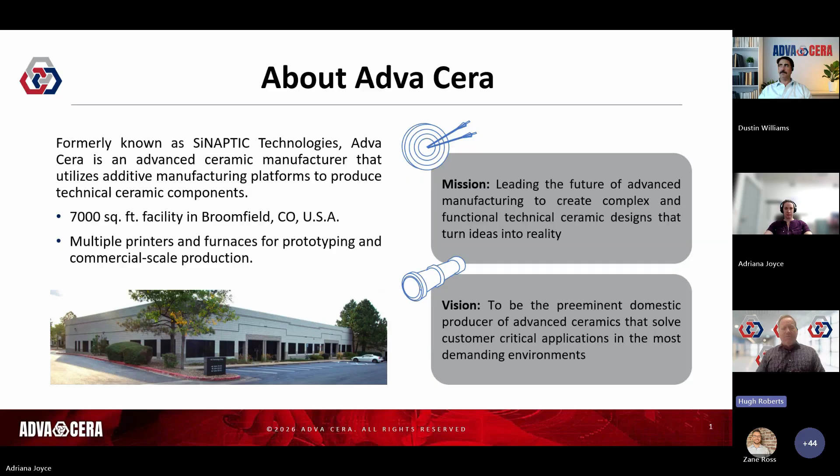A bit of just the company timeline. The company was founded by me and by my co-founder, Dr. Brian Shear, in November of '22. We both had come along this journey because of our interest in silicon nitride as a biomedical implant. We saw the benefits of it being able to outperform titanium or polymer implants, and it was just a better choice for humans.

But we also saw the limitations of traditional manufacturing of ceramics and how that really constrained the ability to develop and grow this material. When we got connected with folks primarily at Lithoz to begin with and understood the true capacity of printing ceramics, it really was a game changer for what we thought the technology and what we thought our mission would be. As we began this journey, my background is medical device, my co-founder is an orthopedic surgeon. This was really going to be kind of the leading beacon for the company.

But we quickly realized as we were starting down the path that there was really no company serving as a service provider, service bureau if you will, for technical ceramics that were additively manufactured in any vertical, at least from a domestic perspective, and really not very many in the world as well. I think there's probably 5 companies that are very focused on printing additive ceramics. So we quickly pivoted and widened our scope and began looking at some of these other verticals that really had much greater total addressable markets than the surgical market we were looking at. We began to really open this up and look at many different verticals for selling our parts.

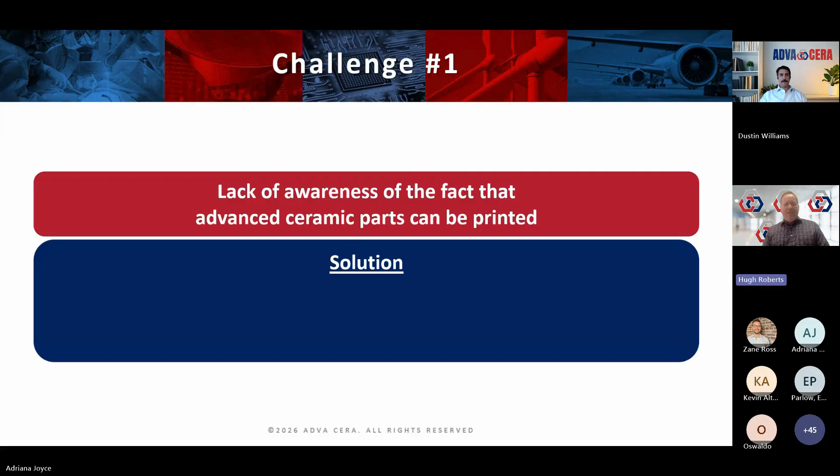That's something people say all the time to us - I didn't know you could print ceramic parts, but you can. And our solution is obviously an opportunity for us to provide customer education on the existence and the rapid growth of the technology, especially focusing on target applications that solve problems for those customers where we can help them out.

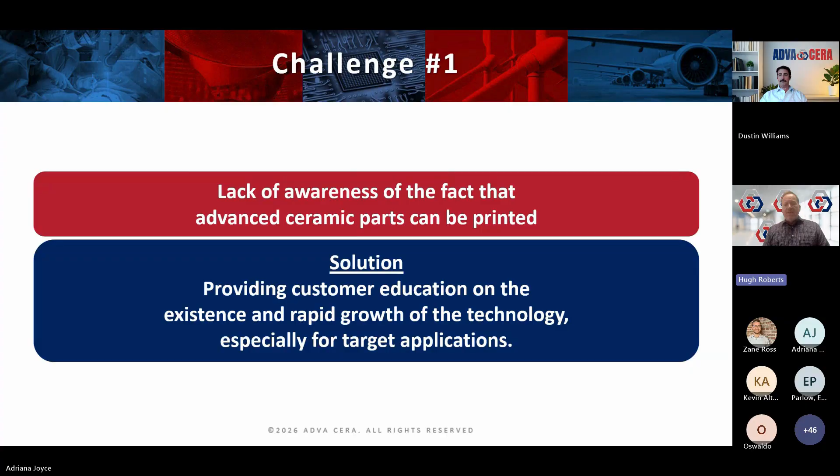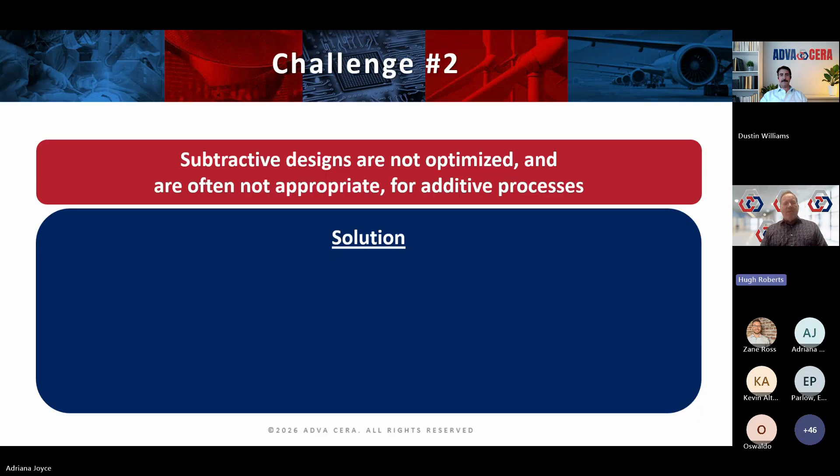Challenge 2: Subtractive designs are not optimized and are often not appropriate for additive processes. Please, please, please don't bring me your traditional ball bearing that you've been making traditionally for years and years. We're not going to help you by making that better because we can print it - that's not really where our talent lies.

Our talents are really more specifically where you need parts that are lightweighted or made more lightweight. Structural complexity, near net shape manufacturing is something we can do quite well. Part consolidation, taking 2 or 3 components and turning it into one part, I think is a great opportunity for AM ceramics. Anything where high resolution or internal geometries are important.

One of the great things about additive manufacturing of ceramics is we're not limited by tooling requirements. So if you need a ball bearing with some sort of heat channeling or heat dissipation, that's a part you probably want to bring to us, and we can do that and make you satisfied and happy with what we're producing.

But at the end of the day, really what this requires is collaboration with our customers, and that's essential for helping to educate and optimize designing for additive manufacturing. That's been a great opportunity for us to really open the minds and eyes of a lot of the engineers and folks that we work with to see how they can push the boundaries of the parts they're trying to make with additive manufacturing of ceramics.

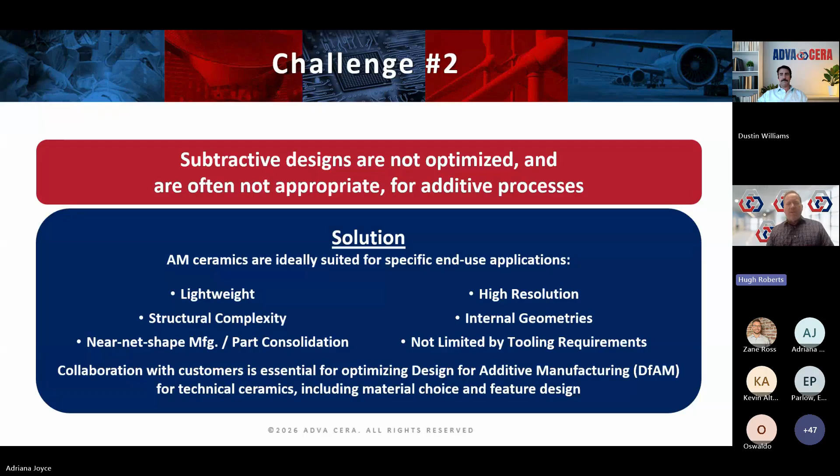This is obviously a challenge for us as well: adoption of AM ceramics is slow due to customers' uncertainty of performance. When we started the company, we recognized that we were going to be ahead of the market, as first movers generally are. And I think that the market is beginning really to catch up with us.

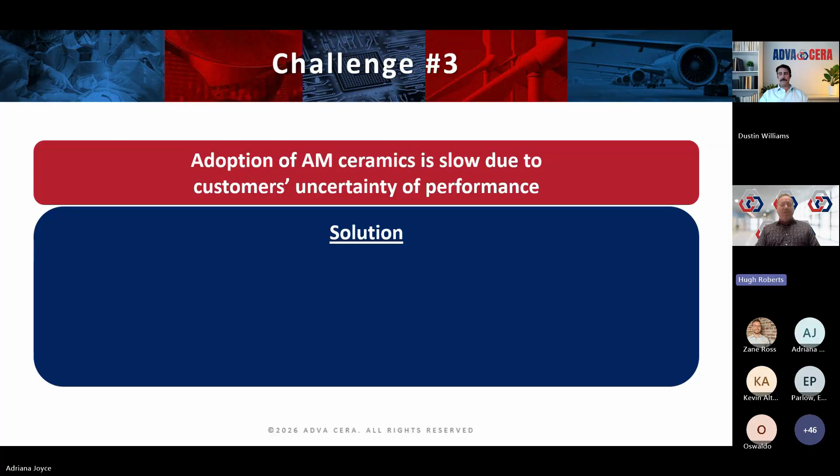I kind of liken this to when electric cars first came out. People really thought that was interesting and thought they were great and weren't ready to buy them. They were just not sure, they just had some hesitation. And so we think that's kind of some of what we do here. We do a lot of prototyping, but getting people comfortable with moving on to production, that's starting to happen much more regularly now, but it was a process for us in the beginning.

And I think that some of this is really going to be best solved by our investment in testing and other activities to determine the material performance and see how well they hold up in end use environments. We are certainly in that stage of the game today, kind of solving and building that trust issue for our customers.

And as I talked about earlier with NIST and with Colorado School of Mines, we're really looking to develop more standards for AM ceramics because there just aren't many today, and create property libraries that we can develop to control material properties and really put out more information about these parts and how they are best suited to solve challenges and work in the marketplace today, despite what vertical that may be - aerospace, semicon, industrial, what have you.

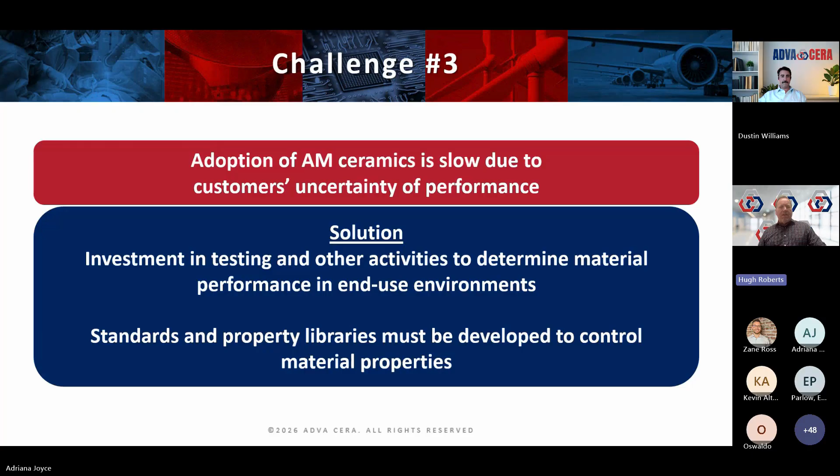Okay, those are the 3 challenges that I really think are at top of mind. And this is the end of my part of the presentation.

So next, I'm going to turn this over to Adriana Joyce. Adriana is an esteemed colleague of mine, and she runs all of the R&D initiatives for the company, which, as you all might imagine, are significant and copious, and she does a fantastic job. So she's going to spend a little time talking about technical capabilities.

Thanks, Hugh. Yeah, want to jump into some of the technical capabilities that we have, as well as some of the design considerations that we look at when working with printing ceramics.

Here at AdvaCera, we've got two types of DLP printers. The Lithoz printer, which we have six of, has a 102 by 64 millimeter build plate, and the Z range is 320 millimeters, so we can print pretty tall parts, although they're not huge in the XY. That is the build plate size.

But because we are printing a ceramic part out of a polymer ceramic suspension, the dimensions of the final part are a little bit smaller, closer to a business card off the Lithoz printers. The light source on the Lithoz comes up from underneath. Looking here on the screen, you can see the lights going up from underneath. That build plate moves up and down over top of the vat.

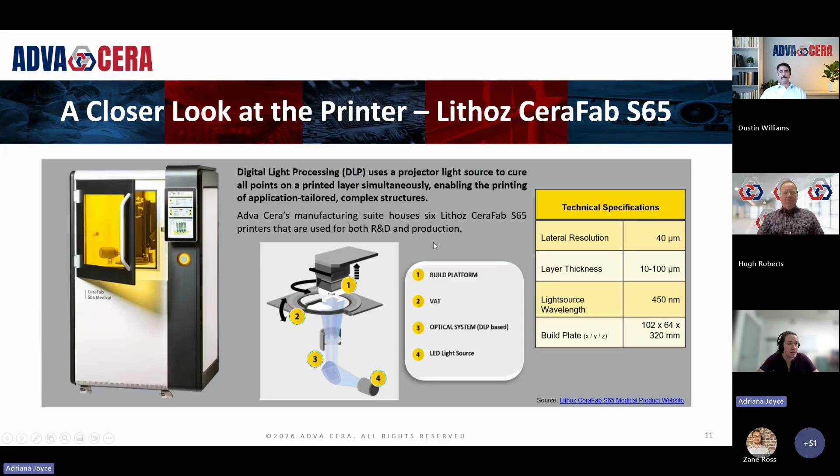On the other hand, the second type of printer that we have is the Prodways Ceram Pro. This one is still DLP, but the mechanism is a little bit different. The light is coming down from the top. It reflects off a mirror, projects down onto the build plate. So the parts become more and more submerged into the vat, into the slurry during the printing process.

Pros and cons to both methods, and we'll talk a little bit more about how each one impacts the printing process. But one of the interesting bits about the Prodways is because this projector is up on the top side of the printer rather than underneath, it has a little bit more mobility, which gives some modularity to this printer.

A single exposure is 66 by 41 millimeters, but because the projector can move, the build plate is modular. So it can go from that single tile exposure up to a 32 tile build plate, making the maximum build plate 264 by 328 millimeters. Quite a bit larger than the Lithoz, although you are then working around the effects of that moving light.

Printing ceramics in general, we can achieve fantastic parts, highly complex with excellent tolerances and sufficient strength for a wide variety of applications. Either of these printers work for a variety of parts, although we pick and choose which part works best depending on the part itself. We can lightweight parts with internal lattices, create complex internal channels for cooling applications, and vary that strength and porosity as the application requires.

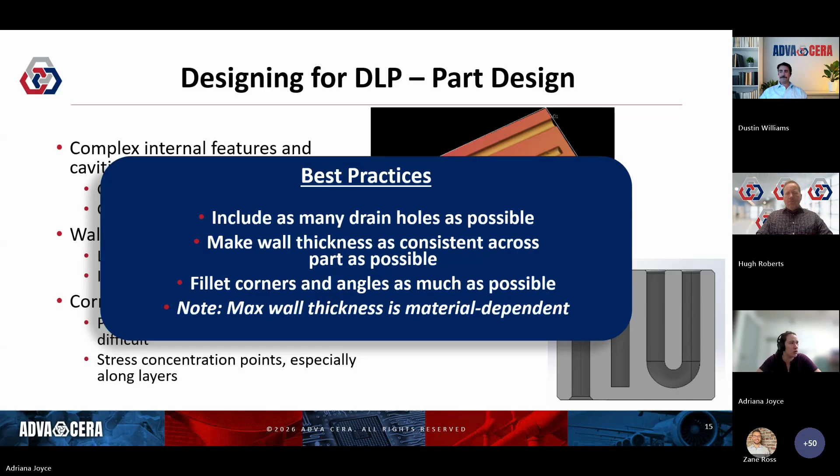Another aspect to consider is that we're taking a native shape—something with smooth curves, round features—and voxelating it. Think of it like making a sphere out of Legos. You know it's supposed to be a sphere, but depending on how big it is, it may look a lot more like a cube because your limiting factor is the size of those Lego bricks.

The pixels on the Lithoz printers are 40 micron, and on the Prodways are 31. That means the minimum feature and tolerances have to account for the way the slice of an image is going to approximate a smooth curve with those tiny squares.

The pixels on the printer take a 400 micron circle and approximate it like this—we've got some pretty harsh stepping and square aspects to what should be a circle. A straight edge not aligned with the pixel grid becomes very stepped, giving a stair-step effect like the printed part shown in figure B along the bottom. Radii approximated by very few pixel steps, like the one shown in B on the right side of the image, don't approximate the size of the feature very well, because we're using pixels larger than the change we need to make to the feature.

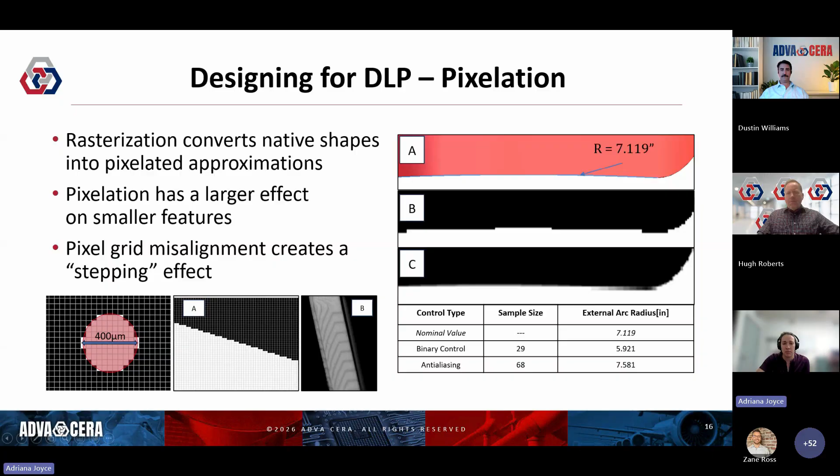But we've got a couple tools to work around these limitations. If we know we have critical features, such as a straight edge that needs to be straight and smooth, we can align that to the pixel grid, so it becomes smooth while less critical features can suffer the stepping effect. We can also size features, if designing the part from the beginning, to multiples of the pixels. Taking into account the scaling needed for shrinkage during debinding, we can make features pixel-sized and avoid the dimensional drift that occurs when a repeated feature or part doesn't stay constantly aligned with the pixel grid. There's also anti-aliasing.

It's well established in other additive manufacturing processes, and that adjusts the intensity of individual pixels, giving us a grayscale effect, which lets us make this 7-inch radius curved feature much closer. Nominal is 7.1. Using binary control, we achieved about 5.9 inches, but with anti-aliasing, we can get much closer, with a 7.5-inch radius on the final part.

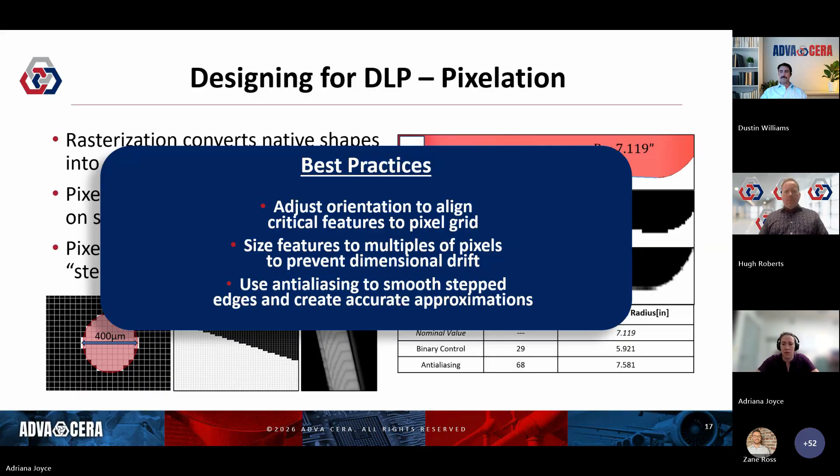The same pixels that are approximating the native shape are projecting light up into the slurry. Fortunately, the light follows the laws of physics and doesn't stay contained in a perfect little square column, convenient as that would be. As the light travels up into the slurry from either direction, above or below, whichever way the projector is going, it encounters the ceramic particles suspended in the photopolymer resin. Those particles absorb and scatter the light, and the scattered light encounters photoinitiators outside of the desired curing zone. This causes overpolymerization and increases the dimension of our part outside the design value.

This effect is material-, slurry-, intensity-, and feature-dependent. Looking at these images along the bottom, for a point, narrow versus wide, and internal versus external, we get a dramatically different amount of overpolymerization, or overcure, depending on the terminology you want to use. That's because depending on the cross-section, the total amount of light density around the point of that corner is different. On internal angles, we've got more light coming in from both sides, increasing the total amount of scatter and therefore the amount of overpolymerization.

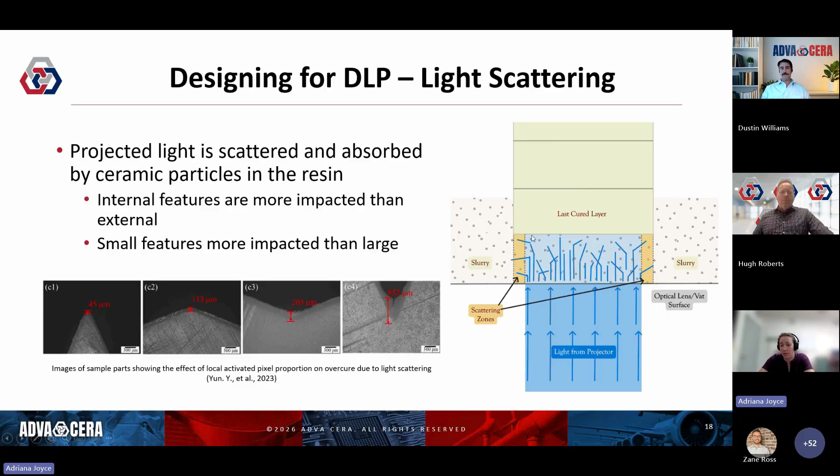But with the knowledge we have around this technology, we've got several ways to account for this. We can modify the exposure time and light intensity to minimize the scatter. We can also modify the dimensions of the CAD model. We've got a database at this point of overpolymerization experienced at different feature sizes, energies, and slurries, so we can modify the CAD model in advance of printing to account for that overpolymerization. And if it changes a little bit with individual features, that's the iterative process of additive manufacturing.

Because we can iterate several times on the same build plate, it's very easy to iterate through green models. We can put three different sizes on one build plate and figure out exactly what overpolymerization each feature is experiencing, finding it all out when one print finishes instead of having to wait for the part to go through the entire sintering process.

And you could probably predict my last point: again, we can orient the parts to protect those critical features. Knowing in advance whether it's a fitting feature or an exact tolerance, we can change how the part is sitting on the build plate to change the light density around a given feature.

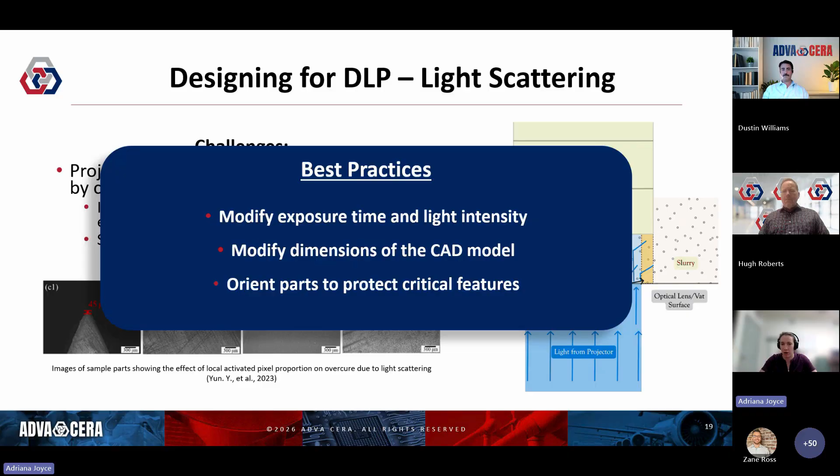We keep talking about print orientation because it's really interesting and it's one of the easiest tools we have to change what the final part looks like. On the Lithoz printer, the part is hanging upside down, and the vat has only enough slurry for a single layer, every layer. It's very efficient in terms of slurry use, and it actually allows the slurry to drain out of open features because they're hanging upside down.

But it also means we're fighting gravity with every layer because of the weight of the part. Any feature that closes up before the print is finished traps any remaining slurry inside it, facing the build plate. It also means the face of the part attached to the build plate needs to be large and flat, or we have to add supports to keep it attached. Overhangs have to be able to support themselves against gravity, or we have to add supports to keep them from flapping around.

On the Prodways printer, the light's coming from the other direction. The part descends into the vat as the layers build up from the positive Z direction. So we aren't fighting gravity, but the part is filling up with slurry. Any feature with a partially or entirely closed cavity is going to come off the printer completely full of slurry. It increases our slurry usage and increases the time required to clean parts. Additionally, the part has to be connected to the build plate well enough that it doesn't float up and away during printing, or get knocked over by the slurry and the blade moving across during each recoat at the end of the layer.

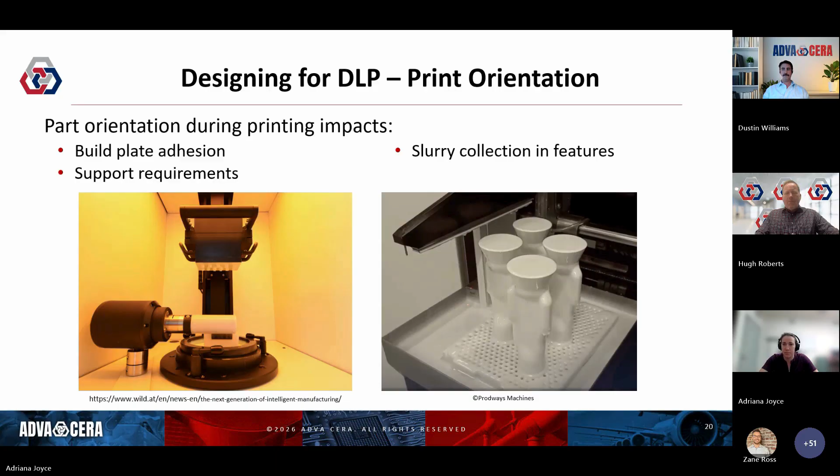With these kind of opposite methodologies, we can choose the printer make and the print orientation depending on the part itself. Minimizing the supported faces is pretty easy if we know in advance which are the critical features, and we can choose where the supports are and how it's sitting on the build plate to do that.

We can also leverage those drain holes that I talked about earlier to allow collected slurry to drain either during the printing process or during cleaning, so we can flow more solvent through, get all of that excess slurry out, and end up with better tolerances and cleaner internal features.

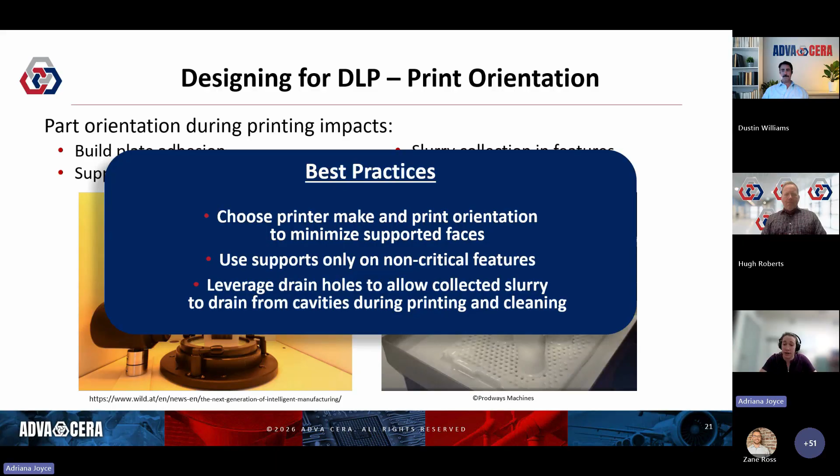Sometimes that print orientation might mean the print takes a little bit longer because it has to be printed in a vertical instead of horizontal orientation. But because the cleaning, thermal processing, and post-processing cleaning up any residual from supports are all simplified, the final part actually ends up being less expensive and much higher quality.

Overall, the things I'd like you to remember as you're designing and working with parts for ceramic additive manufacturing: wall thickness is a material limitation. We have a maximum wall thickness based on the raw slurry, so adding lightweighting features and making sure that wall thickness is consistent all the way across the part will help us get a successful part out.

Use fillets as large and as often as possible, and add drain holes anywhere that you can so that features are better cleaned and the internal features are more true to the design.

We also have to take into account that shrinkage, and make sure that if we are aligning features to the pixel grid, the scaled part is what actually aligns.

As we're printing, spend a lot of time looking at critical features and faces so that we can orient well on the build plate, both to maximize efficiency and protect the critical features. That also allows us to minimize the number of supports required, and consider what overhangs and other features require supports, minimizing those where we can.

We also have to look at the light scattering and the light density in the critical areas. That's more of a CAD model and design consideration, but it also impacts the print orientation as we're going through it. I think that's all I've got from a technical perspective.

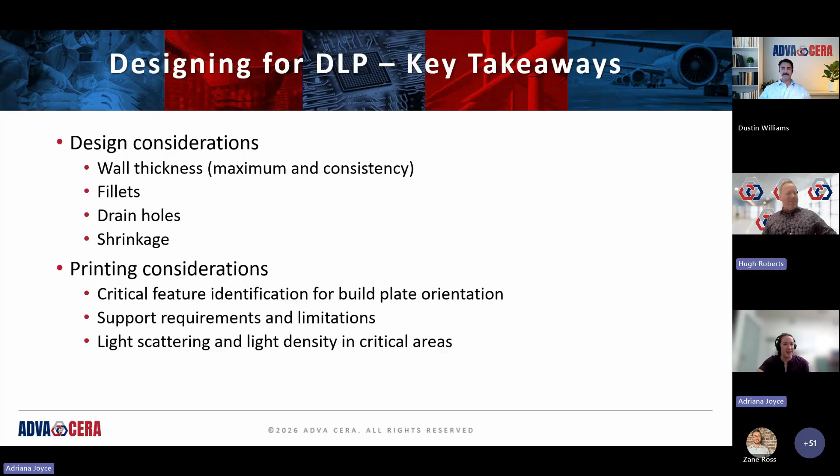Next slide. So obviously, folks, you can tell that this has been many thousands of hours of R&D on AdvaCera's behalf. We've really unlocked a lot of key knowledge of how additive manufacturing for ceramics works.

Now I'd like to bring in my esteemed colleague, Dustin Williams, who runs business development. This is actually the second time I've had the opportunity and privilege to work with Dustin, and he's done a great job with both companies. So he wanted to spend a little time piecing this together and talking more about collaboration and opportunities.

Dustin, take it away. Yeah, appreciate that. Thanks Hugh, and great job Adriana. She was one of the first employees at AdvaCera, formerly Synaptic, so she's really kind of paved the path for this development of our materials, using the technology that we have. She does a great job working with customers and understanding the application and how we could potentially provide solutions for some of those applications.

But why don't we move into what kind of materials, right? What are we printing exactly, and how can they be used? So here's a list of the materials that we are working with currently.

Let's go ahead and start with alumina. It's really the backbone of technical ceramics. When this technology, DLP technology, was first invented 12, 14 years ago, this was the first material that it was developed for. So it's a widely used ceramic. It has a great combination of hardness, thermal stability, and corrosion and wear resistance. There are many applications that can be utilized with alumina, or aluminum oxide. It prints really well, and it can be processed in an oxygen environment, which is always helpful in our post-processing of producing these parts.

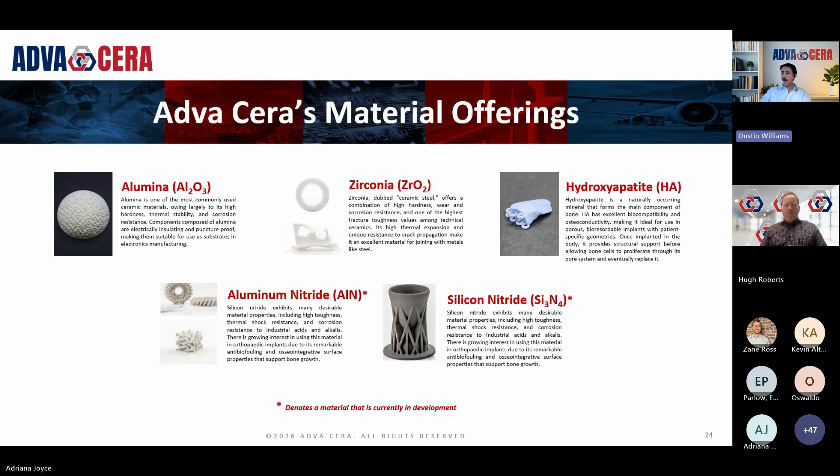Why don't we go ahead and move to the next slide? We can start getting into some specific applications for some of these materials. Starting with aerospace and defense, the audience within America Makes, this is a high vertical for most of the members within the organization, as well as ourselves. Some of our biggest market segments are aerospace, defense, semicon manufacturing, a lot of industrial applications, and filtration applications.

But specifically talking about aerospace and defense, weight is always going to be a consideration. So with our ability to create these complex geometries and hollow out areas or lattice areas to save weight and save density of parts, we have that advantage. And of course, we're talking about extreme environments, and these materials can withstand a lot of those environments.

Another thing Hugh kind of touched on this: manufacturing ceramics is not easy from a traditional standpoint, and therefore it's also costly. So there are some applications where perhaps there's some low volume needed, and the only other way to make a design is a complex tool, which we all know are very expensive. So we do have some advantages there of potentially reducing costs for some of these complex designs, and that customization that just perhaps isn't possible with traditional manufacturing as well.

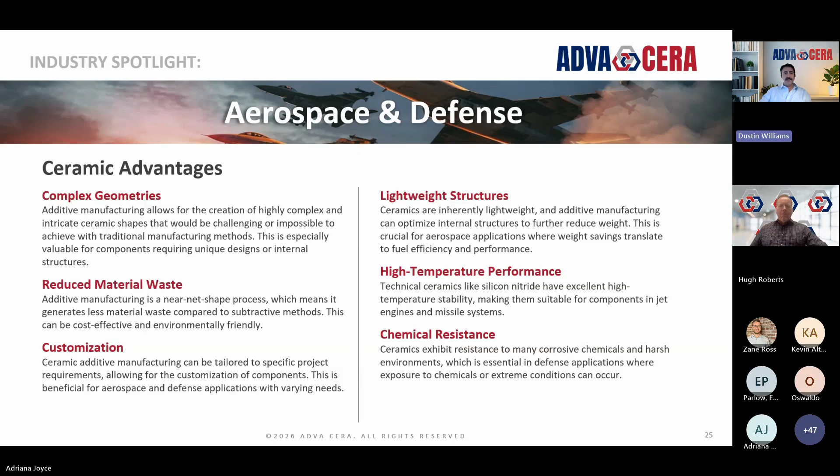So let's just start with alumina. We do a lot of internal features for the alumina components: high voltage insulators, RF microwave switching or filter components, corrosion resistant manifolds or gas diffusion nozzles, radomes, some other dielectric structures, fuel cell components, and filtration in both extreme caustic environments and high temperature filtration environments. We can also tailor porosity from a macro and micro standpoint, whether that's for design or perhaps permittivity of the material as well.

Zirconia also has great applications in aerospace and defense: valve seats, sealing rings, pump components, plungers, liners, any areas where you're going to see high wear environments, but with complex or radiused features that could be difficult for traditional ceramic manufacturers.

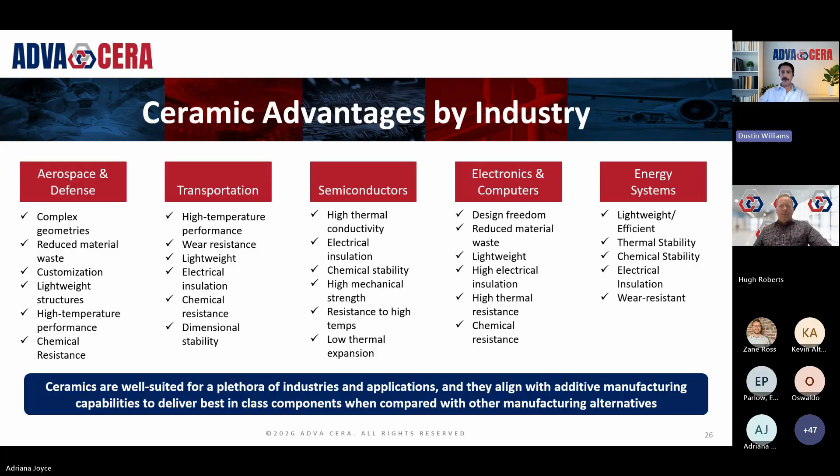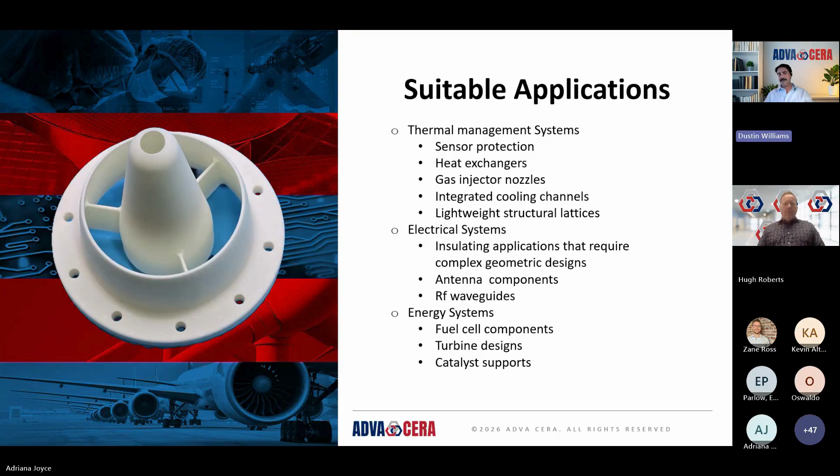It's for a drone application, a variation of a prototype for a project we were involved in. It gives you an idea of the complexities of the geometric designs we can produce on our platforms.

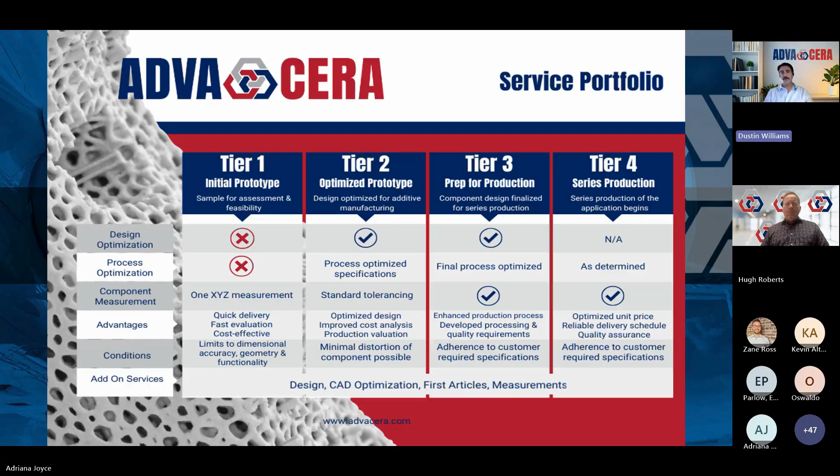We also have a very robust quality management system and inspection capabilities, so our team is set up to do first article documentation for those serial production runs. That process does take time and volume to prove out some of those processes, but we do have those capabilities.

And lastly, I am currently out in Munich, Germany. As Hugh mentioned earlier, I'm attending the ceramitec conference that's held every other year.

It's exciting to be out here and talk about where ceramic additive has come in the last 10 to 12 years, and where it's going in the future. I think we're on the precipice of a lot of market adoption: aerospace, defense, semiconductor, manufacturing equipment, and lastly, investment casting.

We are just in the early stages of starting to work with a new material, silica, that could be used for investment casting cores. So think about lightweighting turbine blades in that investment casting process or casting core process.

I really see a lot of industries starting to take advantage of this technology, and we are fielding calls every day from additional industries or partners in industries we already work in. You can see the projection for ceramic AM—the marketplace is really set to explode, projected to reach 2.5 billion by 2034.

So what is going to drive this? I think it's additional materials. We work very closely with our printer manufacturer partners and material providers, so as the technology matures and new technologies are introduced for ceramic printing, the materials are also going to mature and grow with that.

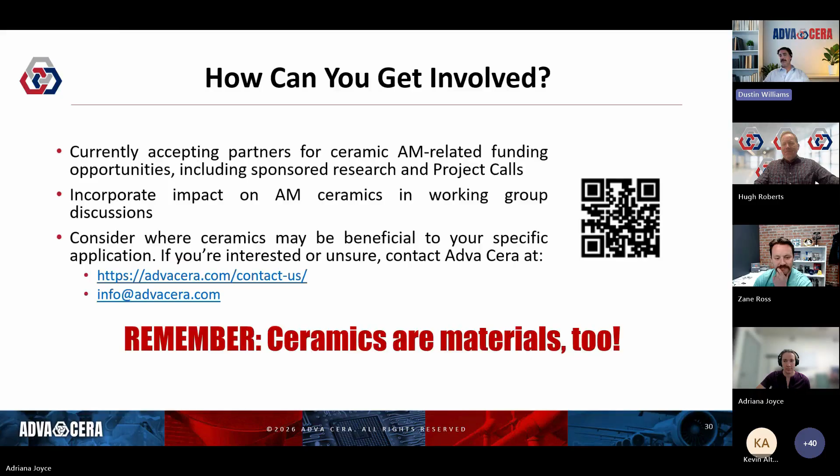There's always some gray area of largest part, because printing is kind of the easy part with ceramics. It's that post processing, it's the debinding, sintering that is always going to be the deciding factor. So I guess to answer that question from a dimensional standpoint, Adriana, if you want to take that, it's going to be, say, depends, right? That's always going to be a good answer.

Yeah, so we are limited by wall thickness, sure, but the largest external dimensions of the part that are possible with the printers we have is 264 by 328 millimeters in the green state. So depending on whether you're looking for an alumina part, an aluminum nitride part, or a silica part, those are going to have slightly different shrinkages. So take 20% off of that, and I admit I can't do that math in my head, but the largest build plate we have is on the Prodways with that modular build plate. So 264 by 328 by 350, times minus about 20%, you can average. Assuming that your wall thickness is within spec, and that's just your bounding box.

Yeah, I see that next question is a great one: what's the thinnest wall thickness that we can go? That is going to be also feature dependent. I get asked that question and I always answer it wrong, because the engineers say, no, Dustin, that's going to be too challenging.

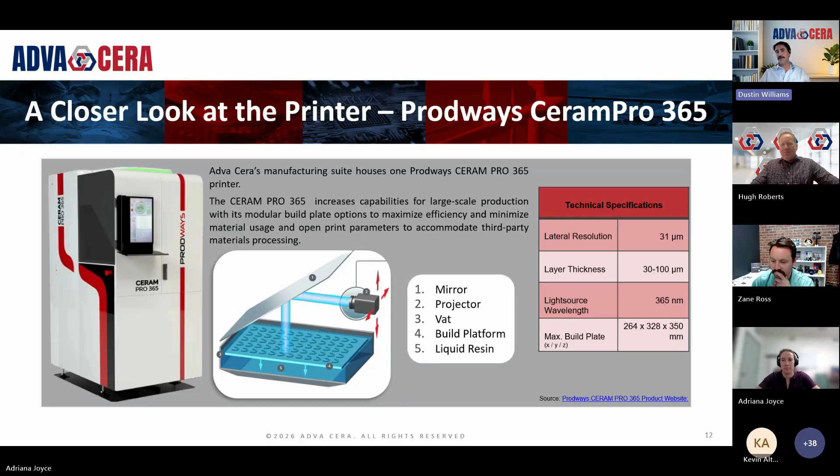I'm going to address that from a general feature aspect. So channels, right? People always ask, what's the thinnest channel or smallest diameter channel you can create? Length of that channel, as Adriana pointed out earlier, is going to be the deciding factor. We have created structures 200 microns or less, but you got to think about the surrounding structure. So that is going to be very design dependent. We have that resolution of 40 and 31 microns between the two printers. That doesn't necessarily mean we can print a 40 micron wall on a part. So it's going to be very design dependent, and the best thing is just submit your design or submit your idea for a design to us, and we can chat through that.

Did you have anything to add? Yeah, if you don't mind.

If we're working with a part that is a consistent thin wall, we've got lattice cubes that have 150 micron struts, and the whole part is about 1 centimeter across. But because all of the walls are consistently thin, we can do 150 micron walls with, I think, about 200 micron wide channels, because the whole thing is very thin and debinds really evenly. But if you wanted to take a 4 millimeter wall base of the part and add a 0.5 millimeter thin wall on top of that, you would have some difficulties unless it was dramatically transitioned from that thick to that thin section. So that's where the feature dependence comes in—we can make the really small stuff, but the rest of the part has to be able to accommodate it during the processing. Does that help with that question?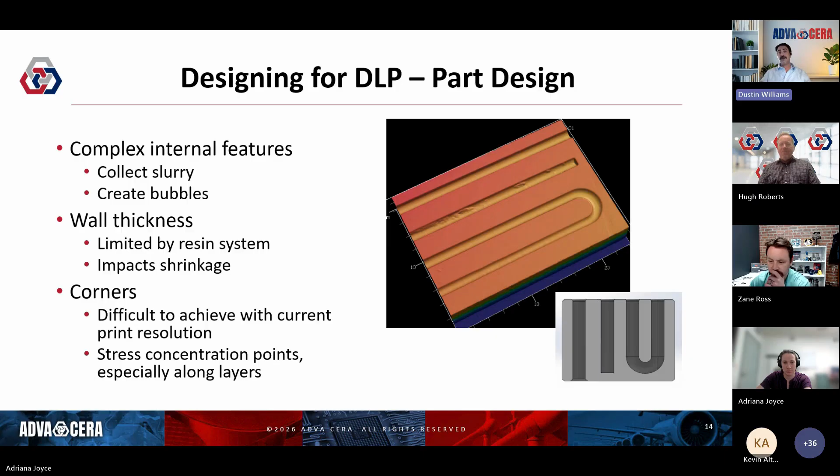I think it's related to what kind of open chamber, what's the max size of open chamber we can do? That's also going to depend, because we can always support open chambers. The real question is can we get in there after printing to remove those supports and then process? So it depends on access. Each material has its own specifications for open radii without supports, or T overhangs, H-type overhangs, and each material has its own unique green state handling characteristics. So that's a complicated question. Again, reach out and let's talk about that application and which material you're looking for, so we can best answer your question.

All right, we've got a live question from Brandon Cox. Hey guys, can you hear me? Yes. Hey, so I've been working in standards development for AM Ceramics for a couple years, a little more than that.

We have some standards in the works. Our first standard was published recently through ISO ASTM. My question is, are there specific things you guys are looking for, a need you see when it comes to standardization? Just to do a quick summary, right now there's been a big focus on feedstock standard development when it comes to characterization of feedstock materials, more on the VPP side, like DLP related. Design also, there's an upcoming standard that will be drafted soon that NIST is working on focusing on imperfections, so common defects that cause material failure. There's also a novel test method coming out by University of Leoben. They've done a lot of studies where they've developed a new way to test flexural strength of AM ceramics rather than a 3 or 4 point bend test. So beyond those, do you guys see anything you need on your end that would be useful when it comes to standardization?

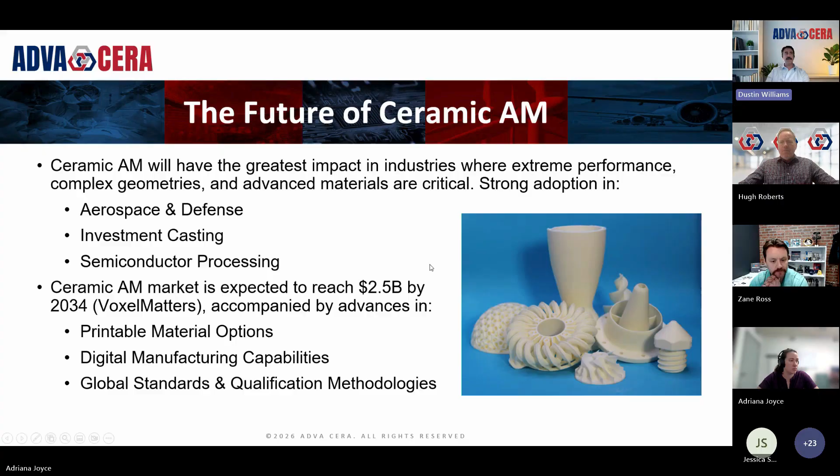And then the last question, regarding wall thickness, the 10 millimeter max wall thickness before or after sintering — that would be a sintered dimension. And again, we're going to be feature and design dependent. What our team likes to do is put a radius or a sphere into the model and see where that max wall thickness is, because we do have to think about diffusion of that gas and keeping as close to consistent wall thickness across the whole part as possible, so the shrinkage rates through thermal processing are matching from left to right, top to bottom, however you're looking at the part.

And just to add on to that, it is also material dependent. So one slurry, one ceramic may have that 10 millimeter wall thickness, where a slurry with a different photoresin system is going to debind differently — the debind rates and products are going to be a little different. So that one will have a different wall thickness based on what material our final product is.